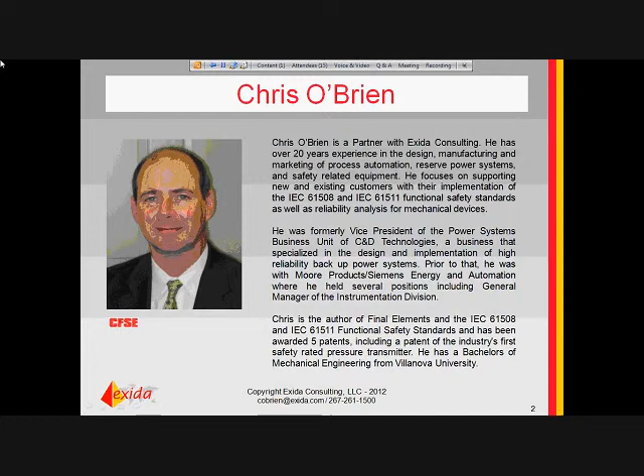I'm a partner with exida, and exida works with organizations, end users, and manufacturers to develop and implement high reliability, high availability safety systems. We've got offices around the world and offer a variety of services. We provide consulting for end users and manufacturers. We provide product certification to IEC 61508 and also to

cybersecurity standards, ISA Secure. We have a wide breadth of training programs available. We make software tools to help do the analysis. exSILentia is one of our most popular tools. We have reference books, and we offer a certified functional safety expert or certified functional safety practitioner training and testing.

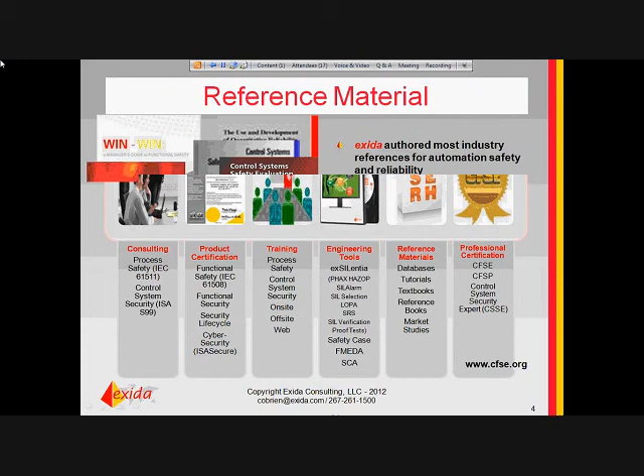So with that brief introduction, just wanted to cover a few of the resources. We do have a very broad selection of books and even a book on final elements.

So with that little background, let's get into the meat of the presentation. There's a lot of talk in the last couple of years about safety, safety instrumented systems, SIL levels, IEC standards 61508 and IEC 61511. There's a lot of knowledge out there, but there's still a little bit of confusion. So I'm going to go through the basics of the standard and then get into details on how that would affect assessment of mechanical devices.

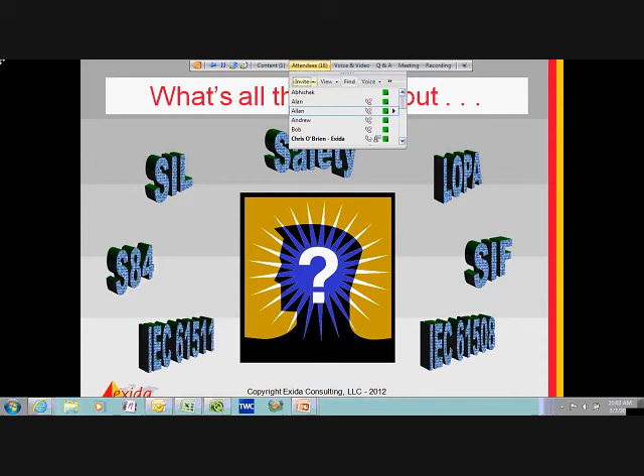So the IEC standards are essentially consensus standards in that they were formed by an international body, and different countries and regions of the world have adopted them. IEC 61508, IEC stands for International Electrotechnical Commission, and that standard was written by a group of experts with representation from literally dozens of countries. That's been adopted as the umbrella standard or main functional safety standard for automated systems.

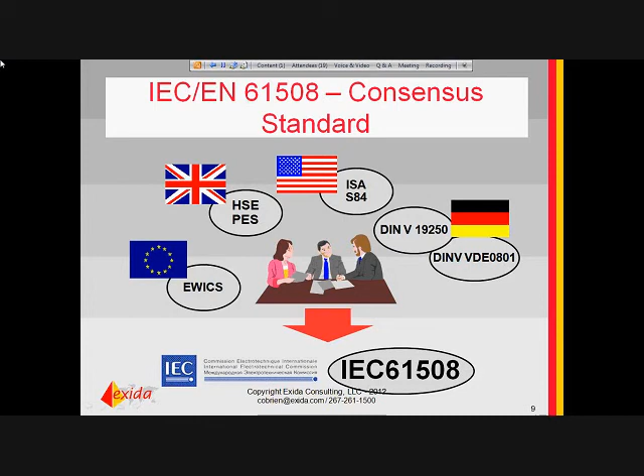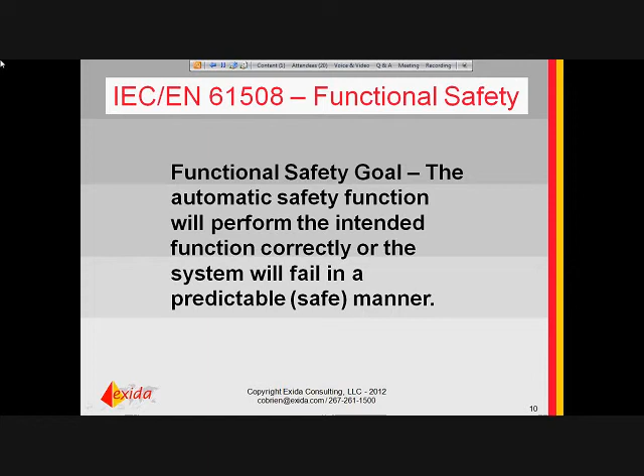If we look at what's the goal of functional safety, it's that an automatic safety function will perform the intended functionality correctly, or that the system will fail in a predictable, which means safe, manner. So it's realized that you can't have perfect safety or perfect reliability, but in those cases when you don't have that, if the system can fail in a safe mode, in an annunciated safe mode, that's good.

The key standards that we're going to look at are IEC 61508, and that's essentially the umbrella standard, and then the process industry specific or derivative standard, and that is IEC 61511, or in North America, specifically the US, ISA 84. ISA 84 and IEC 61511 are identical standards, except for one clause in S84. So we can speak about IEC 61511 and address really the entire world.

Now, the standards are performance-based, not prescriptive, and that means that while some standards, such as fire protection standards, an example of that would be NFPA in the U.S., are prescriptive in that they tell you how you must do, say, the valve configuration for fuel shutoff. NFPA 85 will tell you you need to have redundant block valves and a bleed valve. IEC 61511 would not say that.

It would say you need to determine the amount of risk you have, and then you need to design a system that would get you below your tolerable risk. So it's a performance-based standard.

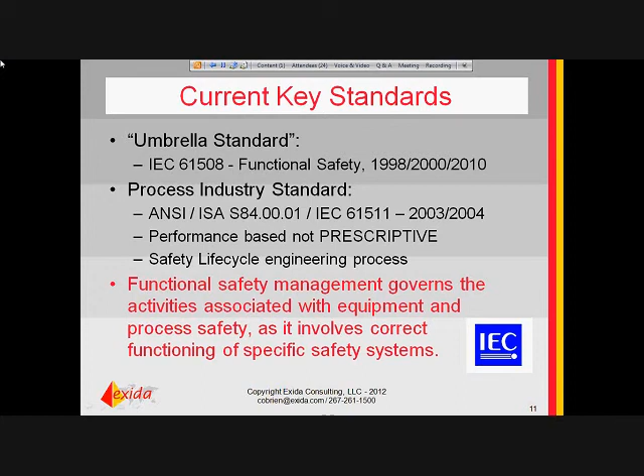Now, IEC 61508, I mentioned, was an umbrella standard in that it's written not to a specific industry. It's written providing guidance on the safety life cycle, guidance on reliability analysis, both hardware and software, guidance on how to do validation. So that is typically targeted, normally that is applied to an equipment manufacturer.

And then there are derivative standards, as they're called. IEC 61513 applies the principles of 61508 to the nuclear industry. IEC 62061 applies the principles to the machinery industry. IEC 61511 applies those principles to the process industry. So those are the derivative standards, or the industry-specific standards.

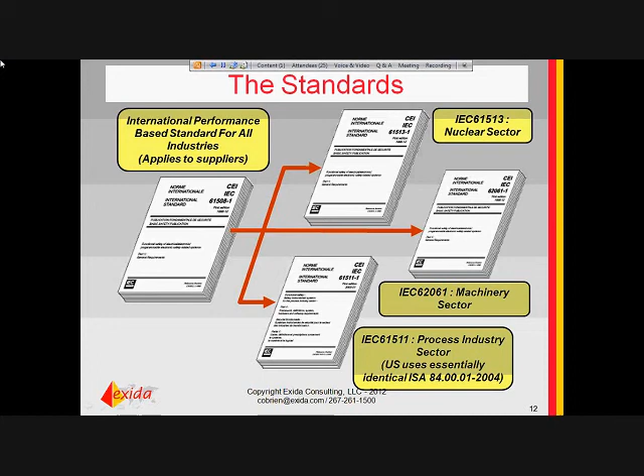We tracked since early in the 2000s the adoption of these standards. By 2005, the vast majority of end users, process industry customers, were using IEC 61511. Prior, the timeline is in 1998, part of IEC 61508 was released, and the complete version of Edition 1 was released in 2000. Even once that was available, some end users started to adopt it, and then very late 2003, around the end of the year, beginning of 2004, IEC 61511 was adopted. That really drove a significant pickup in adoption.

The industries covered by IEC 61511 include oil and gas, refining, chemical, power, pharmaceutical, all of your classic process industries. The adoption by the process industry of IEC 61511 is really driving the demand for certified equipment, IEC 61508 certified equipment. We'll get into why that is right now.

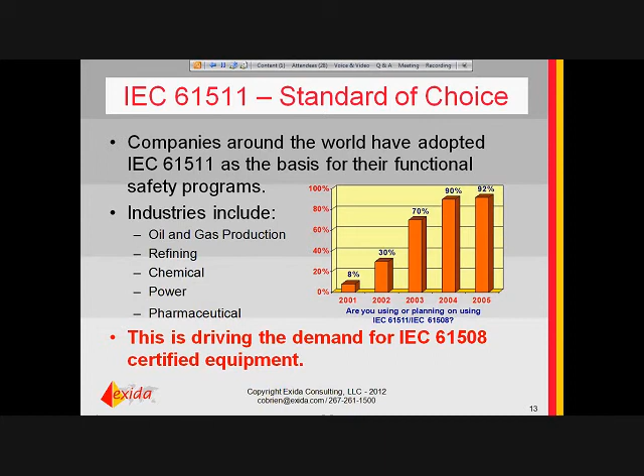What's driving the IEC 61508 certification is that the standard requires proven in use, or an IEC 61508 assessment, for all equipment used in a safety instrumented system. Proven in use is a method an end user can use to look at their installed base and justify using that product in a safety application. An IEC 61508 assessment is something a manufacturer does to demonstrate strength against random and systemic failures to the user.

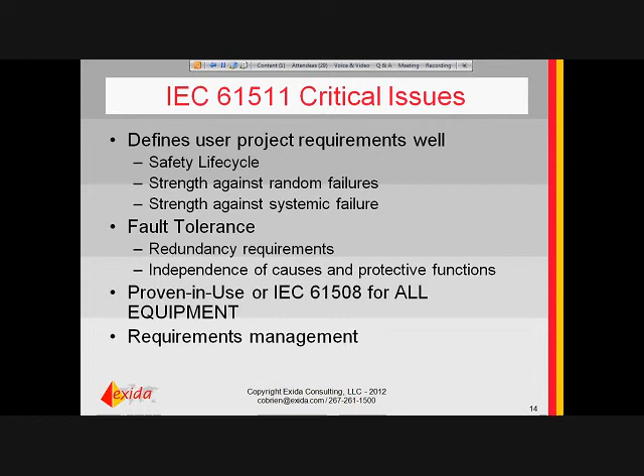The final thing is 61511 requires requirement management: what's required of the safety function, how do you determine that, and then how do you ensure you've met it?

If you think about a process plant trying to achieve a certain level of safety, you can think about the requirements in the standard as elements of a bridge. You've got certain core concepts that are the pillars or towers: planning, systemic failure protection, and random failure protection. Then there are many steps throughout a project that provide the support cables, including safety management, risk assessment, and SIL selection. All of these individual steps are things done and implemented by an end user doing a system.

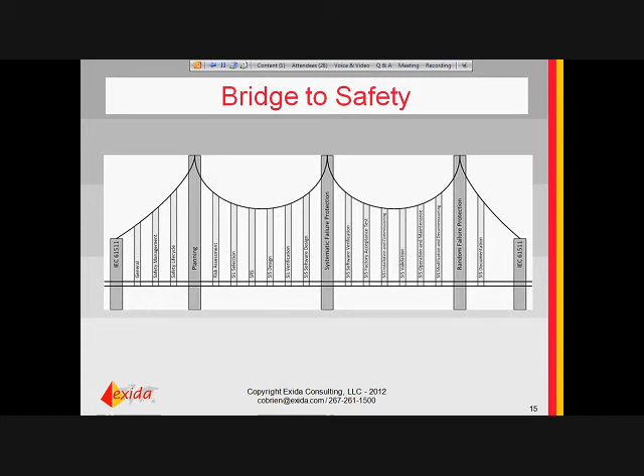In a nutshell, to achieve compliance, three criteria need to be met in an analysis. The system needs to meet architectural constraints, it needs to meet a probability of failure calculation, and it needs to have a certain SIL capability, meaning the strength against a systemic fault is strong enough. Only when these three things are met can you say a system or product is compliant with the requirements of IEC 61508 or IEC 61511.

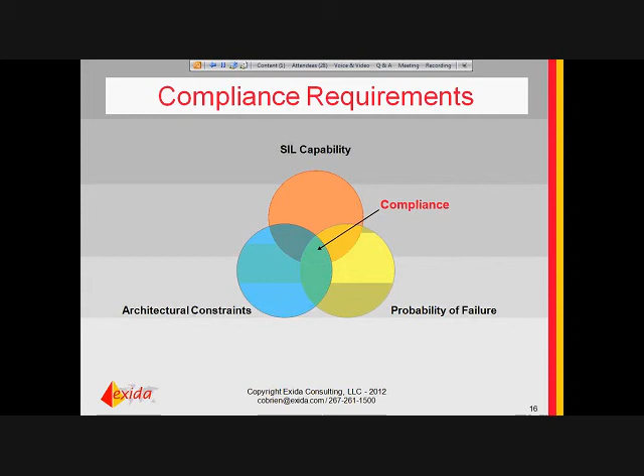IEC 61508 is written for E/E/PE systems, which stands for electrical, electronic, or programmable electronic systems. An obvious question is, why is it applicable for mechanical products if it's focused on electrical or electronic systems? The key is that the standard is concerned with electrical, electronic, and programmable electronic safety-related systems, but it also provides the framework within which safety-related systems based on other technologies may be considered.

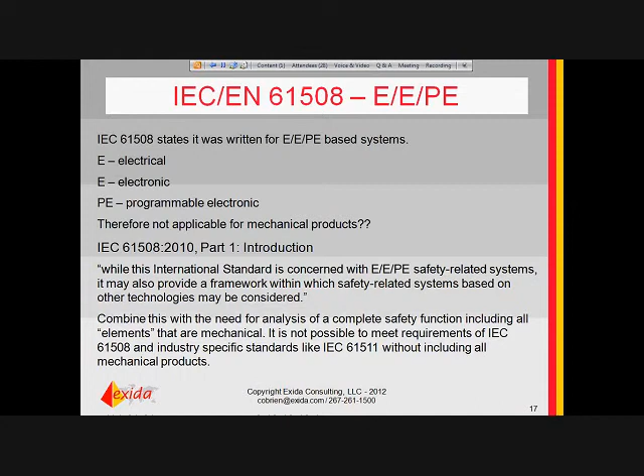So it could be applied to a complete system that was purely mechanical. In reality, the main driver is that anything within the safety function, any element that has to operate correctly within the safety function, needs to be included. It'd be fine if the pressure transmitter and the safety PLC were certified, but that doesn't cover your whole loop. Let's say you had impulse lines on the safety transmitter, a solenoid valve, and a pneumatic actuator connected to a valve. Success isn't achieved unless everything from the impulse lines through the valve works correctly. Therefore, 61508 is applied to all the elements of the safety instrumented function, including those that may be mechanical in nature, so that's why it encompasses everything.

Safety integrity level, or SIL, can be applied three ways when talking about a SIL rating. It can be applied to talk about the risk reduction requirements placed on the system by the end users or by the application.

It can be used to set the probabilistic limits for random hardware failure, and it can be used to establish engineering procedures to prevent systemic failures.

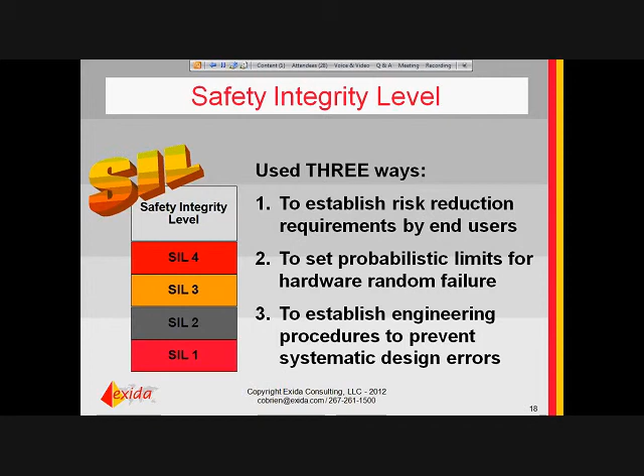Additionally, 61508 can be applied at many levels. It could be applied to a component, a product, or a system. A component could be a transducer, or it could be a software operating system. A product is most typically where we see it applied, and that could be a transmitter, a valve, a PLC, or it could be provided at a system level.

Now, this typically happens when there isn't an industry-specific standard. So we looked at the slide earlier that showed the adoption of IEC 61511. Prior to 61511 being introduced, some people applied IEC 61508 and evaluated their safety instrumented functions for the process industry.

Just late last year, a functional safety standard for automobiles was released, ISO 26262. Prior to that, many car companies used IEC 61508 to evaluate their safety functions. As an example, a safety function in a car could be the braking system, the steering system, or the park assist system. Again, in that case, it's an automated system with embedded electronics doing a function that, if it doesn't behave properly, could cause an accident or make the car unsafe.

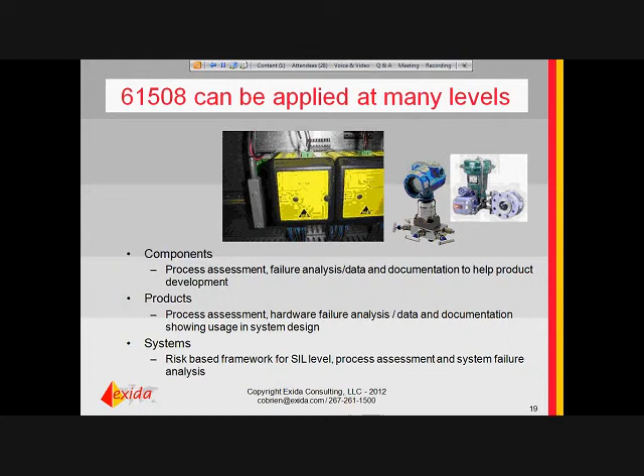Now, if we look at what's kind of some of the fundamental things that are within IEC 61508, we'll see requirements for a detailed engineering process that drives design reliability, and requirements for probabilistic performance modeling or analysis that drive hardware reliability.

The engineering process requirements are geared towards eliminating if possible, but minimizing, sources of systemic faults, design mistakes essentially. The probabilistic performance modeling is designed at managing and making sure that the random failure rates are within tolerable bounds.

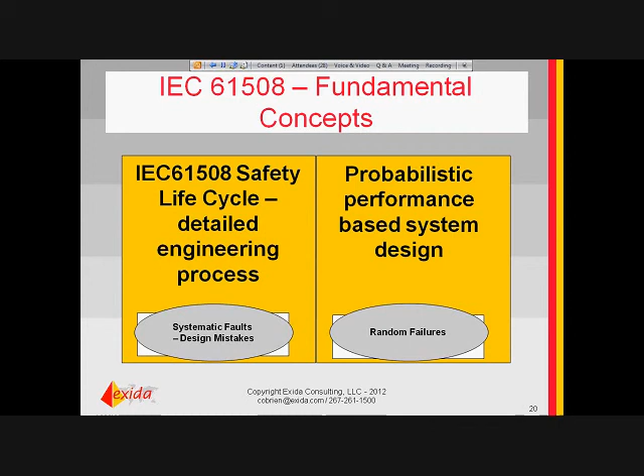So an example of a systemic fault is a valve manufacturer. They were producing valves for over 20 years. There was a new version of their CAD software. They used CAD for it. They got the new version, updated, and after about 2 years, they received a customer complaint that their valves did not close on demand. The valve was stuck open.

Fortunately, there was another safety function in the plant that shut down the process. The valve was removed, returned to the manufacturer, and worked perfectly fine. After some additional investigation, it was found that the drawings for the parts that went into the valve had incorrect tolerances. There was an import function from the drawing software to the tool, and the tolerances were incorrect in that function in the newer version of software.

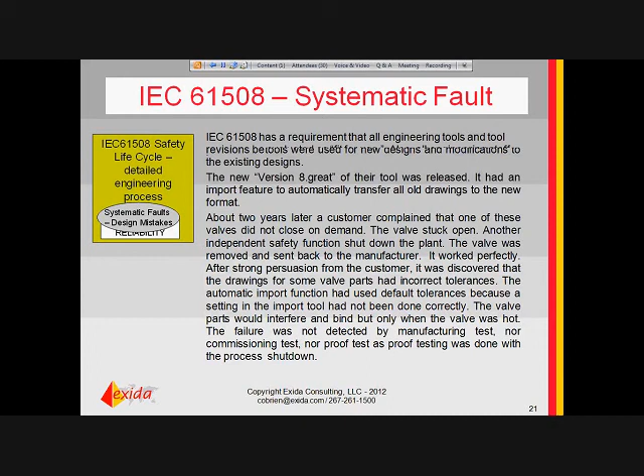So the manufacturer had to add qualification tests for new software tools, and that's an example of a systemic fault: there's an engineering process in place, there's a reliable tool being used, but then there's a change in that tool set that introduces an error. A systemic fault is a fault that can only be corrected by a change in process or procedure. So essentially every valve that went out would have that tolerance error in it, or you can also think of a systemic fault as if it happens, then every device will have that same weakness.

So 61508 has many requirements for design review, testing, and documentation. Compliance with the requirements reduces design mistakes and improves process safety. There are some requirements in 61508 that would not be applicable for a mechanical device or a Type A device, such as a software development process, because there is no embedded software. But management of tools, verification of changes, that would be applicable.

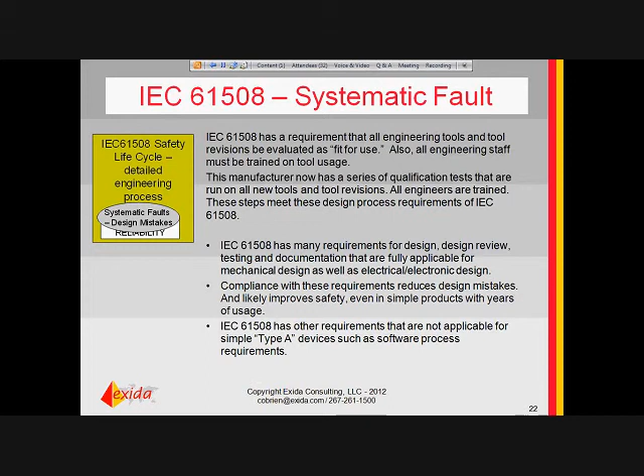A random fault relates to a failure of a component occurring randomly during the normal life of a product. Now every component, every element, has a nonzero random failure rate. So the failure could be settling of a spring, rupturing of a diaphragm, or binding of a valve stem. The goal is to minimize random faults in the design, but realizing you can't get rid of all of them.

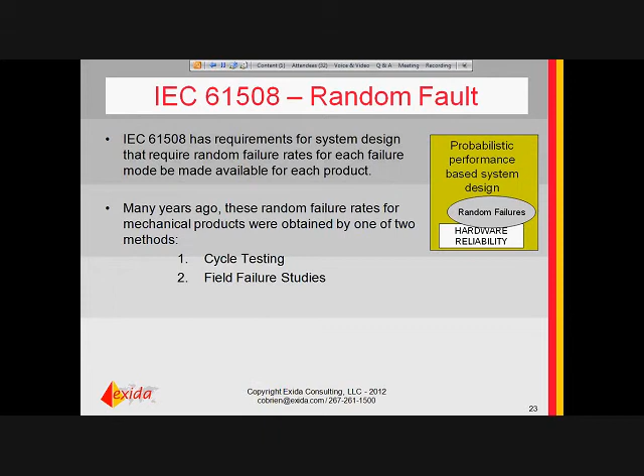So if you can minimize them and then additionally add diagnostics, you can turn them from undetected faults into detected faults. And then the key thing is, where do you get data for random faults? Historically, the source of that data would have been cycle testing and field failure studies. And there's a couple challenges to each of those approaches.

Mechanical cycle testing is fine to determine the life, how many cycles of a product, but that really is a wear out mode. It's not a random failure mode.

Be careful to be sure that anything you might see or use has not been qualified based on cycle testing, because it's going to have an extremely low failure rate, which is not going to be indicative of the performance of a device in a process application.

An example of that is if you had a solenoid and you cycle tested it, you would basically determine the wear out for the O-rings or whatever part was going to fail first. But the failure mode in a process application is that the O-ring is sitting there, energized for a year or 2 years or 3 years and doesn't cycle.

And then you get binding due to cold welding of the elastomer and the metal parts. So you've got different failure modes in a low demand process application than what you're going to find in cycle testing, which is basically the wear out point.

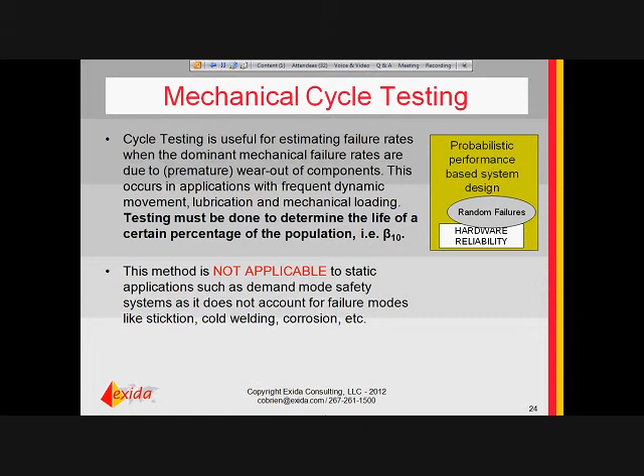Field failure studies are another thing that add some useful information but shouldn't be used directly unless it's an end user with a large population and a rigorous data collection model, because most manufacturers do a very good job of collecting and storing their data for field returns, but they only know what's returned.

They don't know if the end user didn't find the failure, or even if they did find a failure, they may not have reported it because they considered it out of warranty, or it was an inexpensive device that wasn't worth filing and returning.

So field failure studies are very useful. Down here I have a histogram showing different failure modes for a specific product that were returned. So you can get a kind of modal distribution, but you wouldn't want to use that for an absolute number of failure rate.

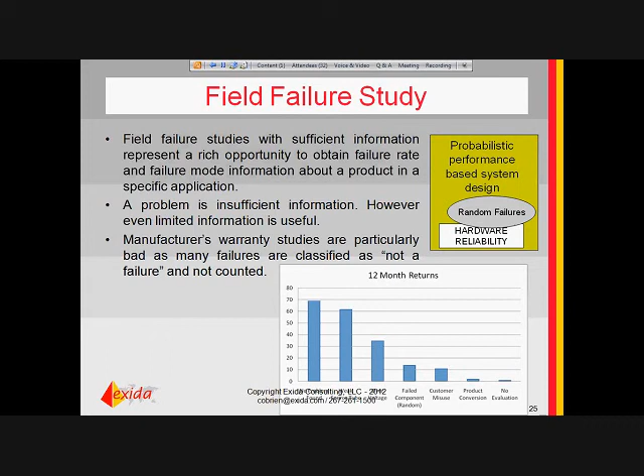A method that's in 61508, and the dominant method used, is failure modes, effect, and diagnostic analysis, where basically you break the product down into individual components and then use a database of failure rates for components. For example, it's much simpler to get the failure rate of a resistor.

Or the failure rate of a spring or the failure rate of a diaphragm in different operational modes, use categories, publish that data, have people evaluate it, come to a consensus, than it would be to get the failure rates for all the many variations of how these products can be put together.

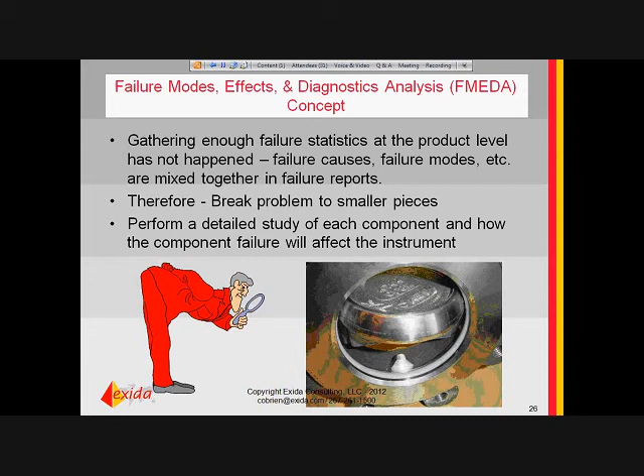So the FMEDA technique takes component failure rates and failure modes, and essentially you build the product out of that.

So there are different approaches. We'll call the cycle method an idealized method, where there's nothing, essentially it eliminates random failure rates and assumes a perfect condition, and you wind up with very low predicted failure rates compared to observed failure rates.

The other extreme, you could take generic ones, which are from some generic reliability studies, such as OREDA and RIAC, and you wind up with what can only be described as having a lot of failure modes that really aren't pure random failure modes, such as wear out and unknown things like whether the environmental application was correct, and they tend to drive extremely high failure rates, leading to pessimistic PFDs.

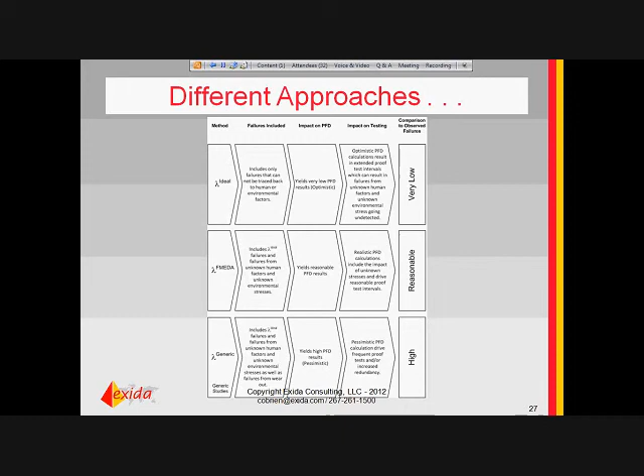And then through the studying, the FMEDA results have been correlated to match and be traceable to actually observed field experience.

This chart here shows the whole range of failure rates that you can find for a solenoid valve. From an idealized method, there was a report that says the failure rate for a solenoid valve is 0.43 fits. The pretty much accepted failure rate for a single resistor is 1 fit. So this whole valve assembly and coil was half of that in this one report of a resistor,

which isn't credible. Then there were some generic studies that showed the solenoid failure rate was between 10,000 and 100,000 fits, and that would mean the mean time to fail dangerously would be on the order of 2 years, which again isn't really reasonable.

Then there's a whole different range, depending on the complexity of the solenoid valve, with failure rates everywhere between maybe 80 fits and up to 900 fits, depending on the complexity of the valve.

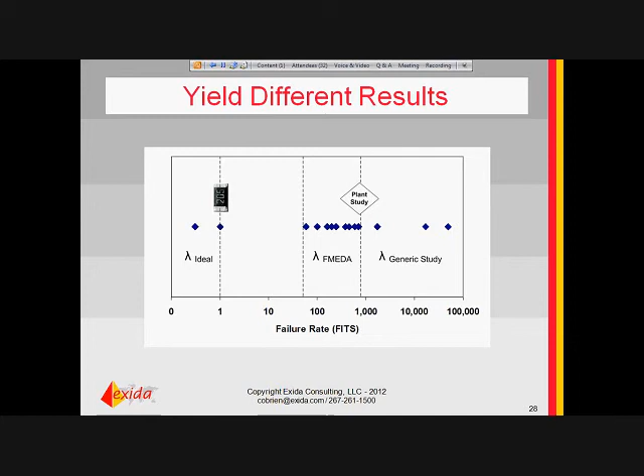And when you compare that to observed failures in the field, that becomes pretty reasonable. And the key to driving those reasonable results is the component database.

So the FMEDA technique was designed by some engineers who weren't at exida at the time. They were at another organization about 20 years ago. By using component failure rates and those failure rate distributions, you can create an FMEDA which gives you product failure rates, product failure modes, and diagnostic coverage.

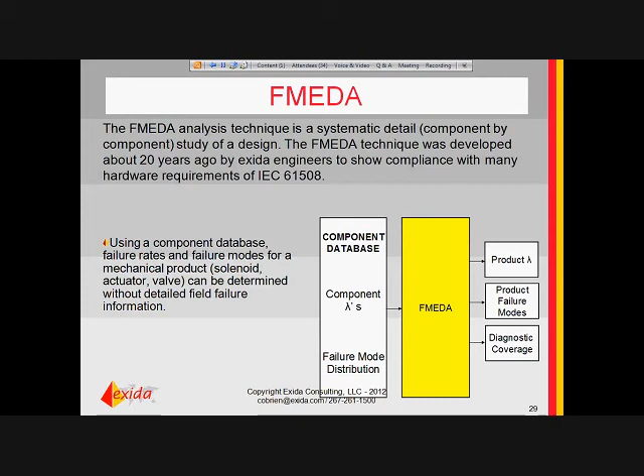The FMEDA gives you a lot of information that you need for the IEC 61508 standard, including failure rates per failure mode, diagnostic coverage of tests such as partial valve stroke testing, and the failure rates for partial valve stroke testing, diagnostic coverage of full stroke manual testing, and lifetime limits of components. So it gives you a report with the data you need to meet the requirements of 61508.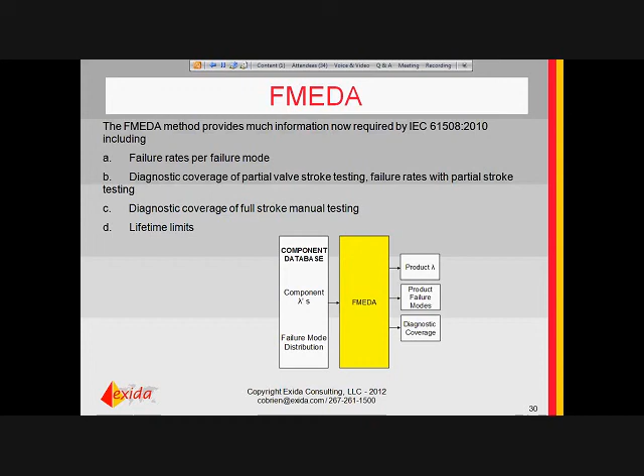If we take just a little look into how you would do an FMEDA, here's just part of an FMEDA for a butterfly valve. And you see that there are components: the body, the seat that's part of the body in this particular valve, and the disc. So we're only looking at a couple parts here.

There's a component. What is it? It's a valve component, butterfly. Use category, typical materials. What are the failure modes? So for the body, we have bind and minor leak. A binding would be dangerous. A minor leak would be external. How many parts? What's the failure rate?

Lambda is essentially the failure rates, given in failures per billion hours. What's the distribution? Any remarks? And could you find it? So if we look down, say, on the disc, we could have bind, break, minor leak, major leak. And in this case, we've got 720 fits, with the distribution 10%, 5%, 70%, 15%.

Is it a dangerous failure, or a 'don't care' failure? And would a diagnostic find it? So here it's saying, if you've got binding, we give 60% credit for a partial valve stroke test and 90% for a full valve stroke test. If you've got leakage, well, a stroke test isn't going to tell you anything about leakage, so then you don't get any credit for it.

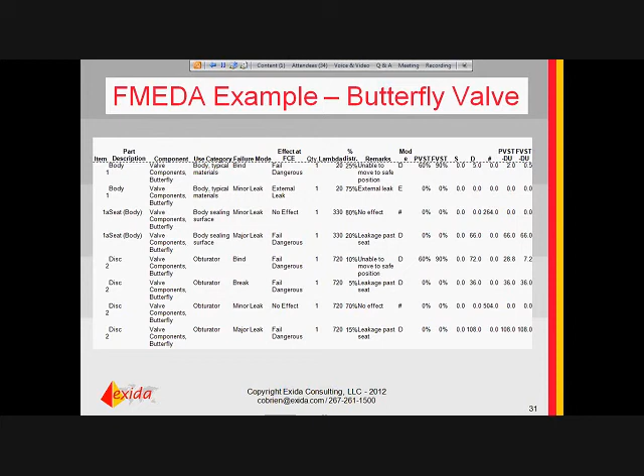And then you just sum it up, and that's how you sum up the results for all the parts in the product, and you get the results at a product level.

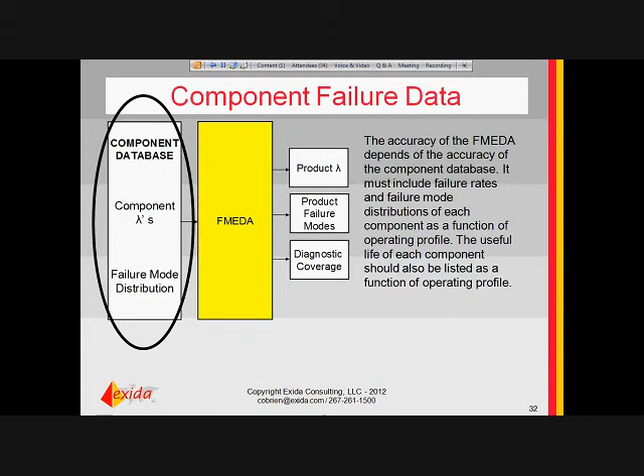Now, the accuracy of the FMEDA depends on the accuracy of the component database. So it must include failure rates and failure mode distribution for each component, and the useful life of each component also must be documented. So where do you get the data?

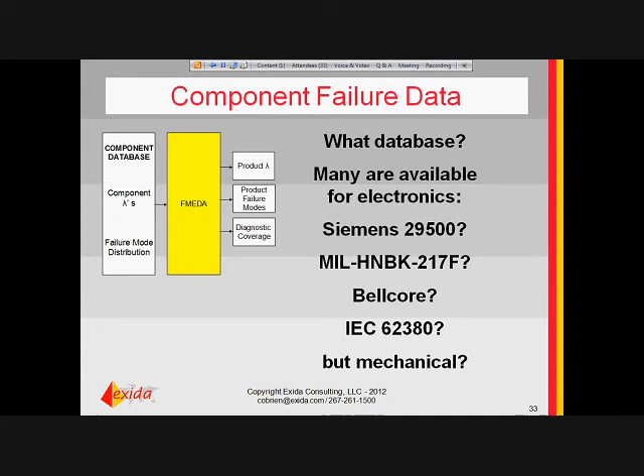There's a lot of databases available out there for electronics, the Siemens database, MIL-HDBK-217F databases, Bellcore, IEC 62380, but not really for mechanical. So what we've been doing at exida for the last 10 years is collecting data.

So you start with some expert opinion, look at field failure studies that you can get a product failure rate from. You've got field studies, you've got industry databases, you can get a product failure rate. You can go from this database, generate an FMEDA, compare them to that, and see how well the predicted matches field experience. If there are significant differences, you dig into it and update the component database.

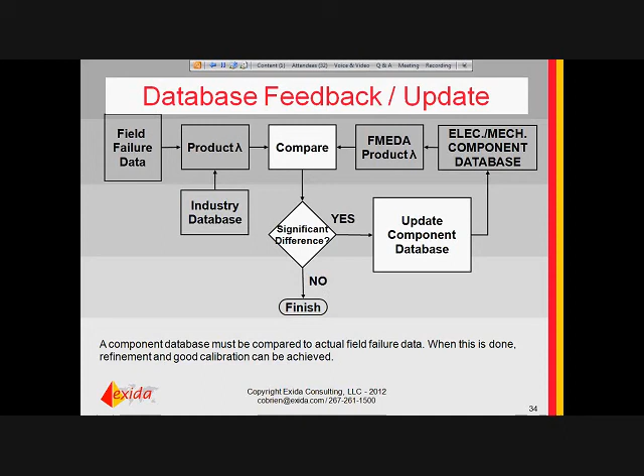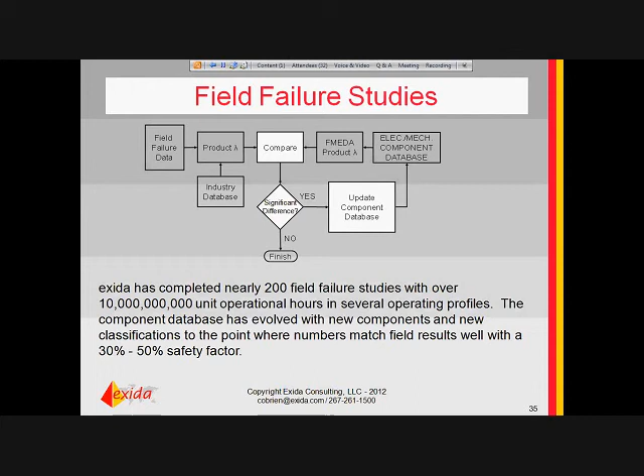So we've got over 10 billion operational hours that we studied. We have nearly 200 field studies with over 10 billion hours, and the database has evolved and really been refined and become quite stable over the last probably 4 to 5 years. And we continue to do this, we do this on every certification project. But the data is very stable, and it's configured to have a 30 to 50% safety factor, because you can't account for everything, so you want to be somewhat on the conservative side.

We publish that data, both for the electronic and the mechanical, in our Electrical and Mechanical Component Reliability Handbook, so people can use it to do their own analysis, or they can look at it and say, hey, I really think that this number is not representative for these reasons.

So if we switch to thinking about a 61508 certification, the complete certification, what are the milestones? Well, first, the hardware has to meet the PFD average of the target SIL, so you've got to have essentially low failure rates. The lower your failure rates, the more fail-safe your design, the better, and the higher or better your diagnostic coverage also is good. It must meet safe failure fraction requirements for the SIL target. If there's software, the software has to meet the requirements for systematic fault avoidance.

In addition, even if there is no software, the general development process has to meet those requirements. The product has to meet the general process requirements for the target SIL for systematic fault avoidance, and you've got to generate some documentation, such as the safety manual for users.

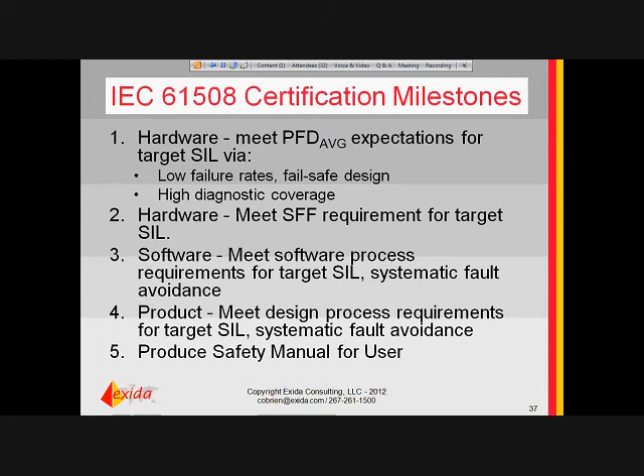How does that impact a product development process? Well, first, you've got to have a documented safety life cycle. It's got to be written down, it's got to be followed. You need requirements for the safety-related functions of the device, a safety-related validation plan, and a defined architecture.

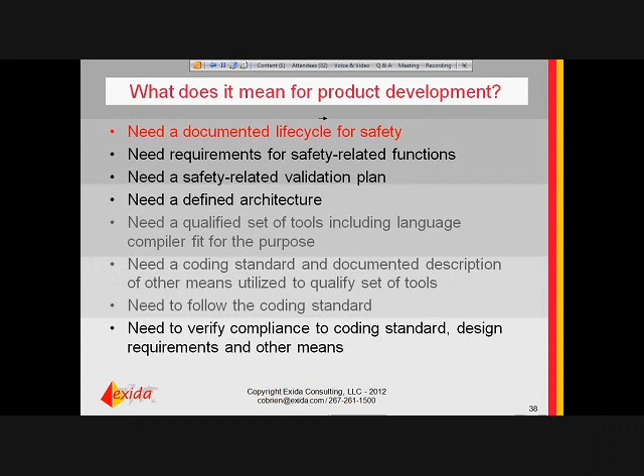So you need a qualified set of tools, you need a coding standard, you need to follow the coding standard, and you need to have a compliant process. And then finally, whether it's type A or type B, you need to verify compliance to the coding standard if there's software, but if there's not, you still need to verify compliance to the design guides and design rules you've done. So if we look at a typical flow...

You would have a project plan, product requirements, and these - you might generate a functional safety management plan, a safety requirement spec. Then you would decompose, whether you're making a valve or an actuator, you would have a list of requirements, and it might be R1, could be a CV requirement, could be a torque requirement, could be sealing requirements.

So for each of those safety-related requirements, you would do a design and you would have a test to show that requirement was met. Often with valves or mechanical products, you'll do it in engineering, but the production test also will validate the function. So that's kind of why you might do verification in engineering, where you do qualification and your general design, and validate each unit before it goes out the door.

You would generate documents required, such as the safety manual. You'd have a management of change process. Those would include field return analysis, internal change requests, customer requests, controlling of purchasing parts, and then finally obsolescence. So that might be a simplified functional safety management plan, in a visual way, for a valve or an actuator or a solenoid.

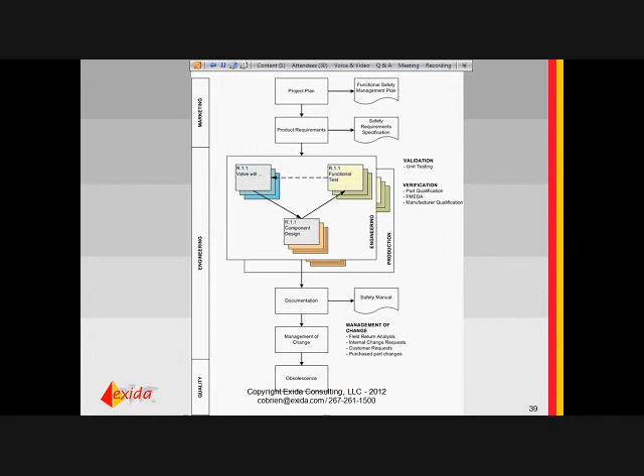Then if we looked at what it would take, what happens with certification, this is kind of a typical list of documents, or documents similar to that would need to exist or be added to your plan. So you need a functional safety management procedure. You need to document your functional safety management plan, development procedure, safety requirements spec.

Now, some of these things - the standard doesn't require you to have specific IEC 61508 documents, but it does require that the intent or the things called out for in these documents exist. So you might have a general development process that meets the requirements of IEC 61508. Your general product spec might meet the requirements or meet the criteria of a safety requirement specification. But you can see as you walk through this, there's quite a few documents required, and they go through everything from product conceptualization to design to validation to manufacturing and maintenance.

A typical certification project looks like this. There's a project start, and then there's kind of a branch that would go down evaluating the random strength of the product. And then there's a branch that's looking at the systematic strength, and they kind of meet up in the safety case. So the FMEDA would give failure rates for a product. The gap analysis and training and baseline safety case would provide training, collect documentation showing that systematically the development process and management process was in place to meet 61508. And then there'd be assessment.

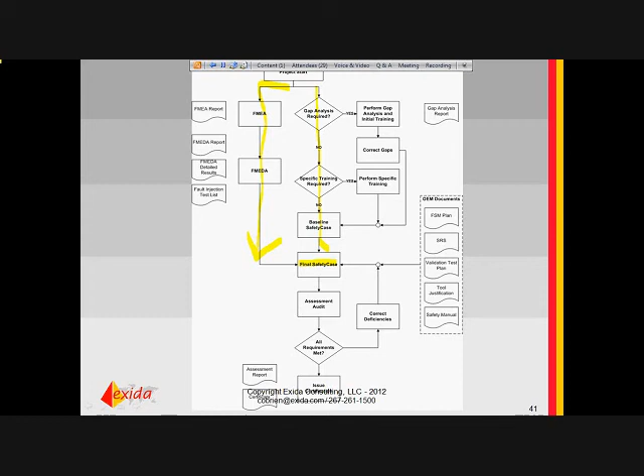Timeline could be anywhere from 3 to 6 months for a device. And usually the gap analysis and the FMEDA are done in parallel, and then the safety case is completed, and after that, with the final site audit and final safety case at the end of the project.

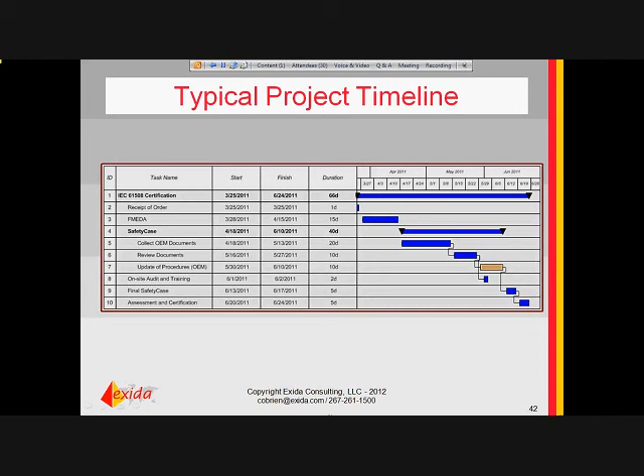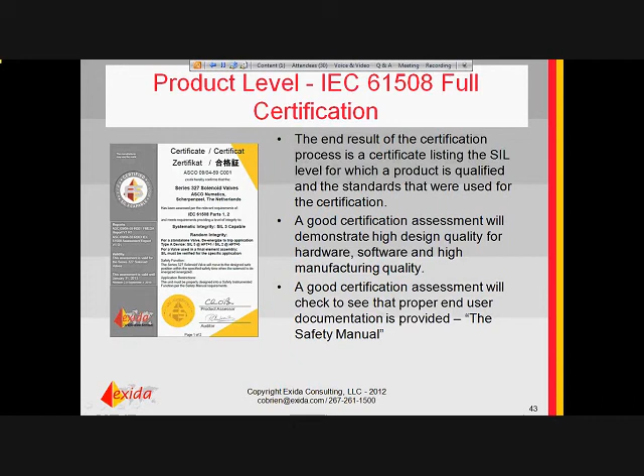If you're successful, you would get a certificate documenting the product and what SIL level was achieved.

End users are increasingly adopting IEC 61511, and that's driving the need for certified equipment because, as I mentioned before, to implement 61511 you have to either do a proven-in-use analysis or use products that have been assessed to 61508.

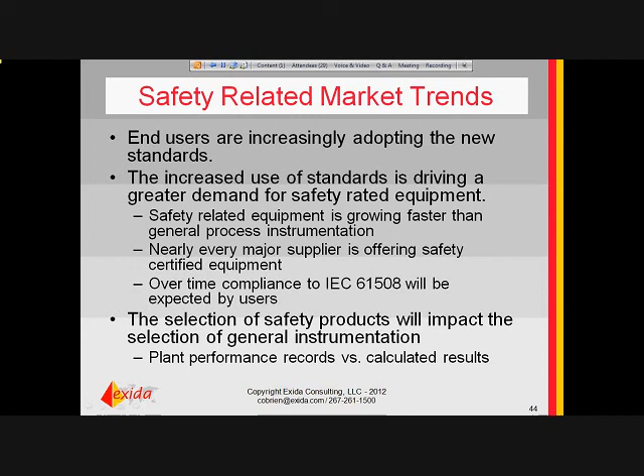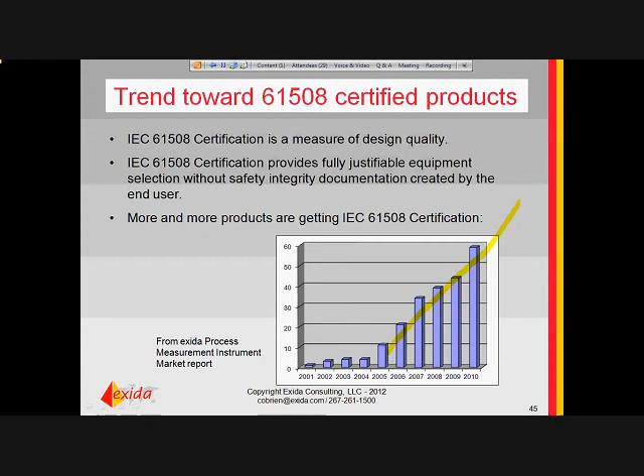And in general, we haven't updated this for the last 2 years, but if we look at certified products—these were measuring devices—you can see it just continues to increase, and I can tell you it has continued to increase like that. More and more of the industry is implementing or supplying certified products.

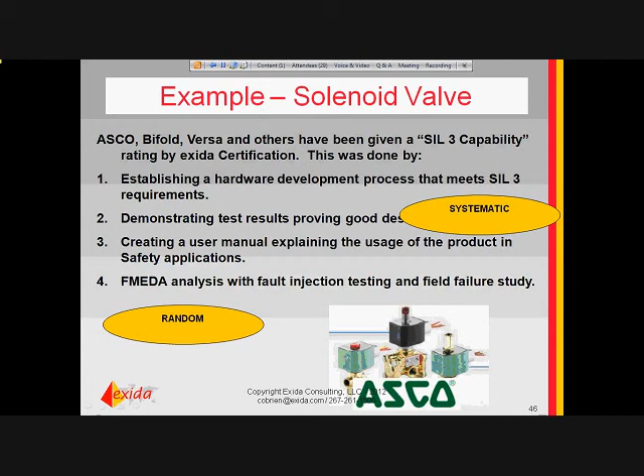As an example, if we looked at a solenoid valve, ASCO, Bifold, Versa, and many others have SIL 3 capable products. They've done it by establishing a hardware development process that meets SIL 3, demonstrating test results, proving good design process, creating a safety manual explaining the usage of the product, and using an FMEDA analysis with fault injection testing and field study to demonstrate the random failures are accurate.

If you want to get an idea of what's out there, we keep a list we call our safety automation equipment list on our website, and we list all products, whether we've certified them or a TUV has certified them. Any product with what we'd say is a credible certification is on this list, and you can search for it by sensor, logic solver, final element, and then by type. So if you're an end user, you can find certified products out there, and if you're an OEM, you can see what's going on in your particular market space.

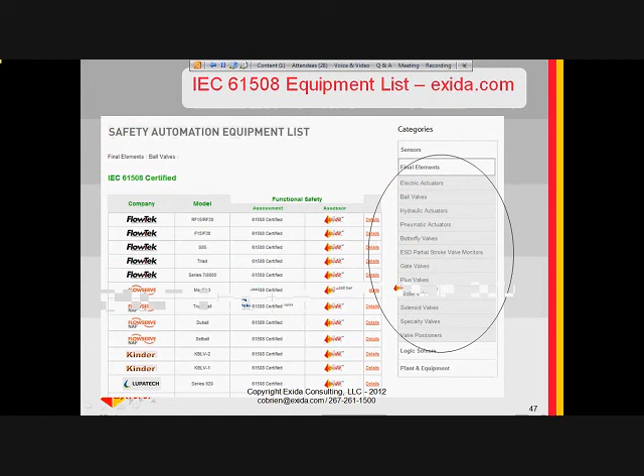So this one is for ball valves. This is a snapshot—this is just the full list at the time for the ball valves.

Our certification program reviews the design process assessment, essentially ensuring that all the applicable requirements of IEC 61508 are met, and demonstrating adequate systematic integrity, which can be done by a combination of proven use and process, and the FMEDA, which is often supported by a fault injection test. A fault injection test essentially means if a diagnostic is claimed, you need to insert that fault—the fault that the diagnostic would cover—and demonstrate that the diagnostic works. If you do that, you can take credit for diagnostics which take dangerous failures and make them dangerous detected as opposed to dangerous undetected.

We are accredited—we have ACLASS accreditation from ANSI to IEC 17025 for doing assessments.

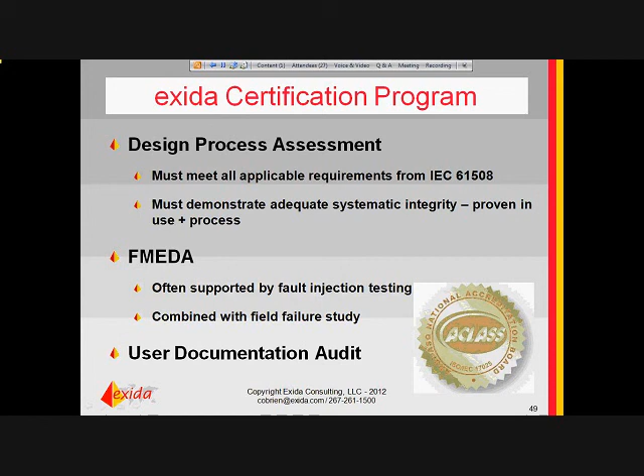We use a safety case tool that we've developed, which essentially lists all the requirements of the standard, and for a project we go through each thing and create an argument as to why the specific company or product met those requirements. When that's all done, the safety case is done, including storing evidence documents in the safety case. The project engineer would work with the OEM, collect this, coach them on it, accumulate all the evidence documents, store them in the safety case, and then the assessor can come in, take a look at the arguments, do the audit, and review and confirm that everything is appropriate and covered. If not, there would be a finding. If it is, then it would be completed.

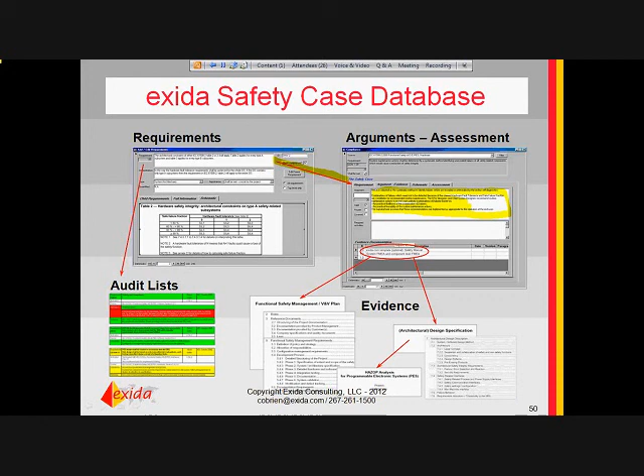So Exida has really excellent competencies. We've got staff members who are active members of IEC 61508. We've been involved since the 1990s. We helped write the standard. We've developed some of the analysis techniques used in there—for example, the FMEDA analysis, which was developed in the early 90s and has been adopted by the industry. We've taught courses to other agencies, including some of the TUV companies. Some of the TUV companies license our tools and analysis software, and we include many people who were either in product development at OEMs, at assessing companies like TUVs, or with end users. So we've got a very nice blend of expertise.

Got a Q&A question: how often do we update the component reliability? We update the printed book every 2 or 3 year cycle. We add components as we identify that they're needed. So a failure mode or components that, on the electronic side, had been added maybe in the last 5 years were small geometry microcontrollers with small geometry memory storage. Small geometry means a submicron, a very small distance between the gates, such that background radiation can change the state of the gate.

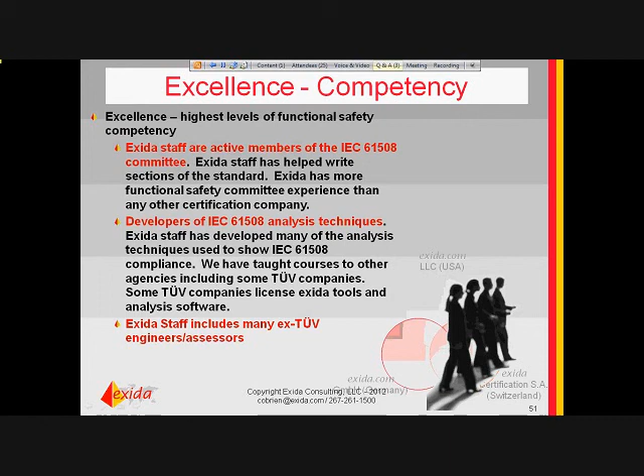One question is, there are not many reliability data certifications about electrical relay. Do you have any information on FMEDA studies? That's very, very true. There are some general numbers for a relay. There are some smart relays that have been done, but they're more like a Type B smart relay.

Niccolo, if you want to send me an email, I can try to get you some information. I'll give you the guidance that we typically use - we have a generic relay failure rate, and we can take this discussion offline. But then you look at the mode. The prime failure mode of a relay would be the coil failing or opening, so that would typically be safe if it's de-energized to trip, or the contacts welding. So if you do some type of current protection of that relay, you can justify using a lower failure rate. But shoot me an email - I think my email is at the bottom of the screen - and I'd be happy to get you some more information.

I saw one question come and go, which was, should a motor control center be Type A or Type B? That would depend - if it's purely a coil pulling in a contactor, and there can be discrete electronic circuitry, then that's Type A. If it's a smart motor controller that's got software and components conditioning that signal and controlling inrush currents and that type of thing, then it's probably Type B. Again, if you shoot me an email with a bit about the product, I could give you a more definitive answer.

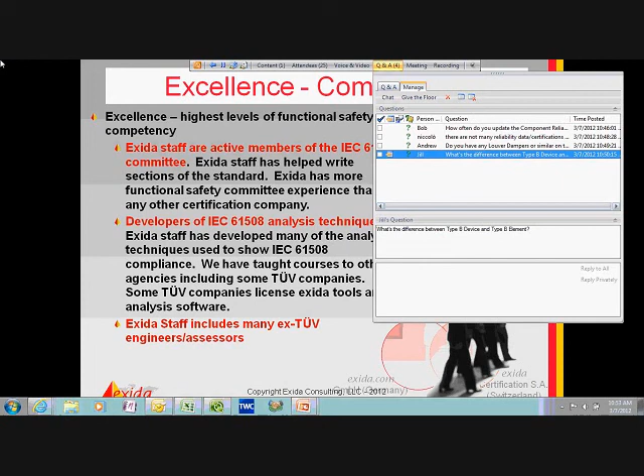So our experience, we've done an awful lot of certifications, really more than anybody else. We've done about almost 70% of all certifications for field instruments, valves and actuators. That's over 100 out of 150 as of almost a year ago, so we should update this. But if anything, our percentages have grown.

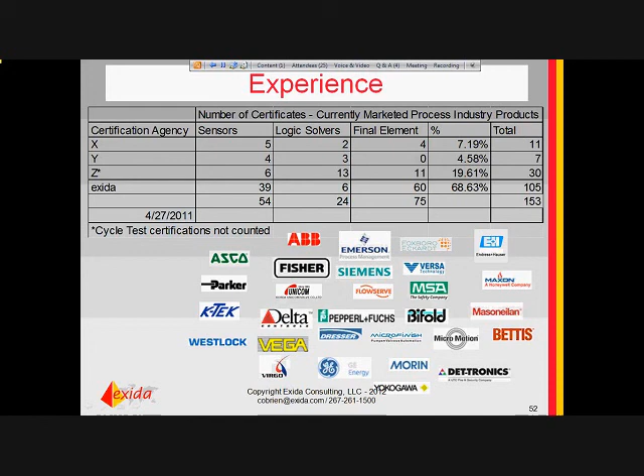I mentioned we were accredited by ANSI, so we have to go through the same thing we ask our customers to go through.

One more question. Do we have failure rates for inverters failing to a high frequency?

I think that in the electromechanical reliability handbook we have this. I'd have to check, but I think we do, because that would be a failure mode.

I guess the follow-up question would be: are you looking at a component on a board, or are you looking at a device? A device - so I think we've got them for components, and then if you're looking at, say, an AC power module or something, you would do an FMEDA on the module and get those failure rates for the module.

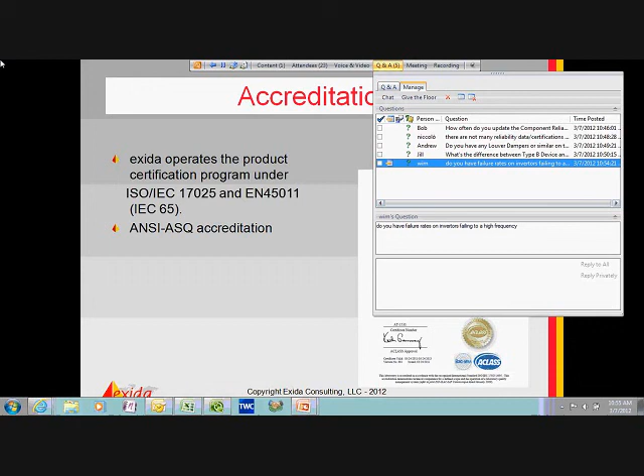We're doing just fine on time, so I guess I'd ask if there are any other questions. Thank you for attending, but I've got some time - if there are any additional questions, I'd be happy to answer them.